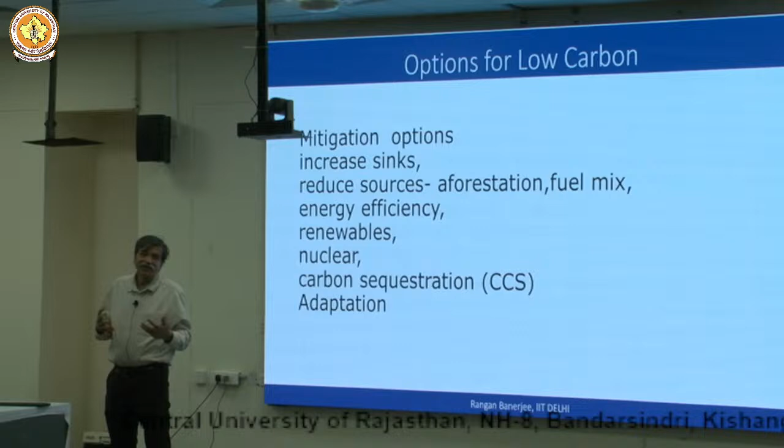What we do today, based on that, things will happen in the future, and these are the options which are available to us.

I talked to you about renewable energy, right? And renewable energy, what do you think? Look at these 5 options: energy available naturally, energy that does not result in carbon dioxide emissions, energy that has no losses of conversion, all of the above, none of the above. How many think it is one?

Out of these 5 options, just raise your hand if you think the correct answer is 1. Anyone? No? Correct answer is 2. I think people are... 3. Okay, I think you are not willing to answer.

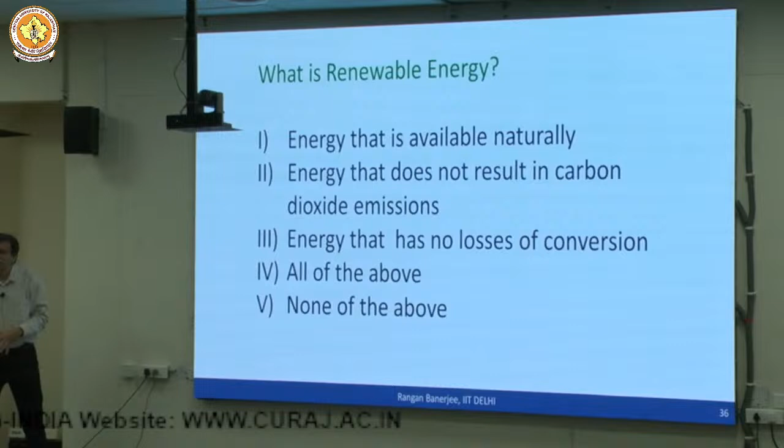The correct answer here is actually none of the above. Because fossil fuels are also available naturally. Fossil fuels have happened over millions of years of pressure and weight on vegetation, which has become coal, oil, natural gas. As for energy that does not result in carbon dioxide, you have biomass, which is renewable but can actually emit it. And all renewable energy has losses of conversion.

So I bring you this to define what is renewable and non-renewable. Non-renewable is depletable. Renewable is that the energy gets renewed despite the usage.

So in the solar PV plants that you have on your campus, the fact that you are using the solar energy does not affect the amount of solar energy which will be hitting your panels in the next year or the year after that, right? So this gets renewed despite the usage.

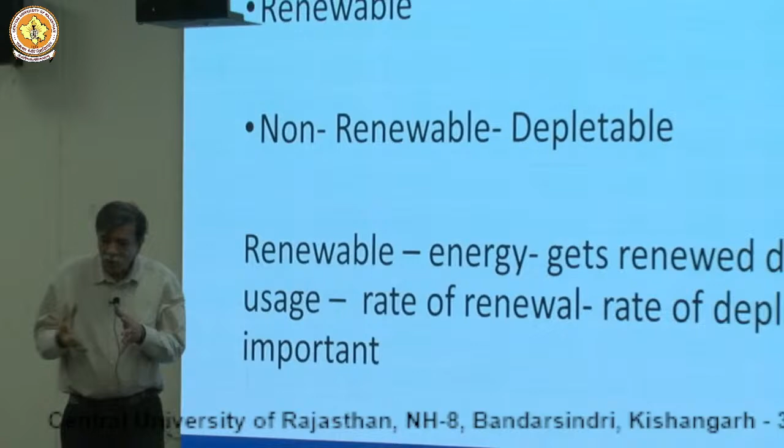That is not true about the... now even when you talk about coal, oil, natural gas, they do get renewed, but over a long period of time. The rate at which we are depleting is much higher than the rate at which it gets naturally renewed. So this difference between these two gives us the definition of what is renewable and what is not renewable.

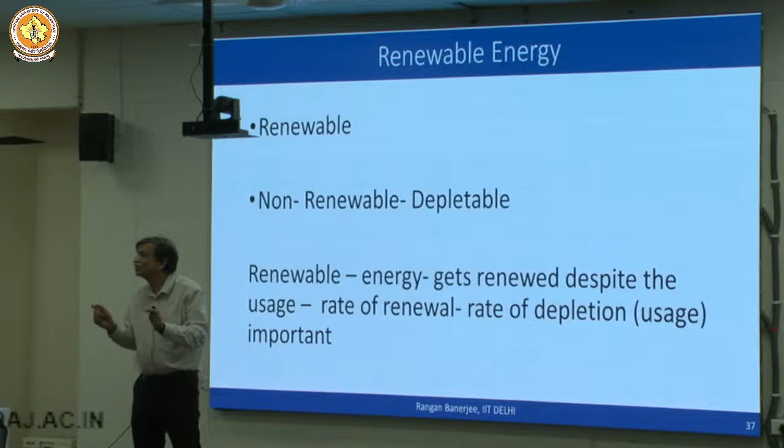I hope that is clear. So it's the rate of renewal minus the rate of depletion.

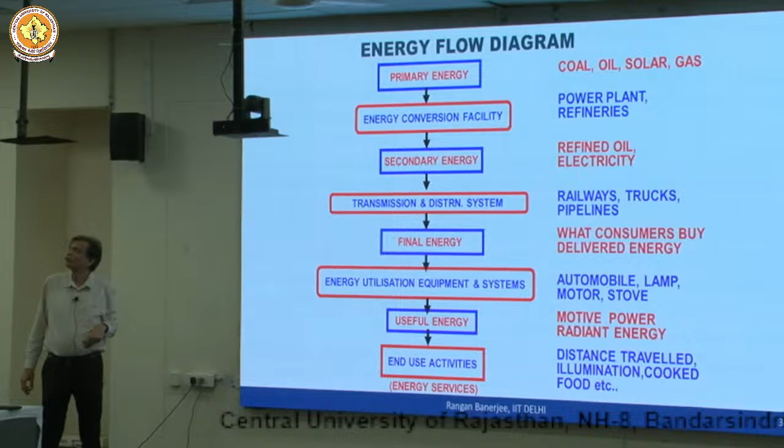Another thing which you need to understand is that for all of us, we don't have a demand for energy per se. It's not like you're talking of a certain amount of something that you consume and you have a demand for that.

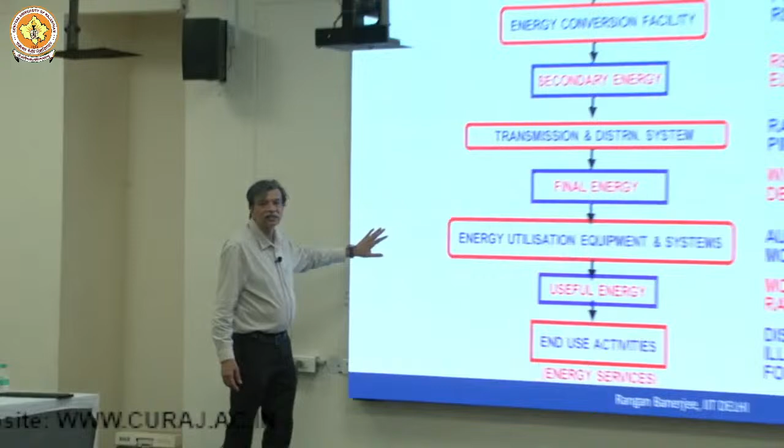What we have in this room, you want to be able to see this projected, so you need a certain amount of lumens or light output on this. You don't really care what is the rating of the bulb in your LCD projector.

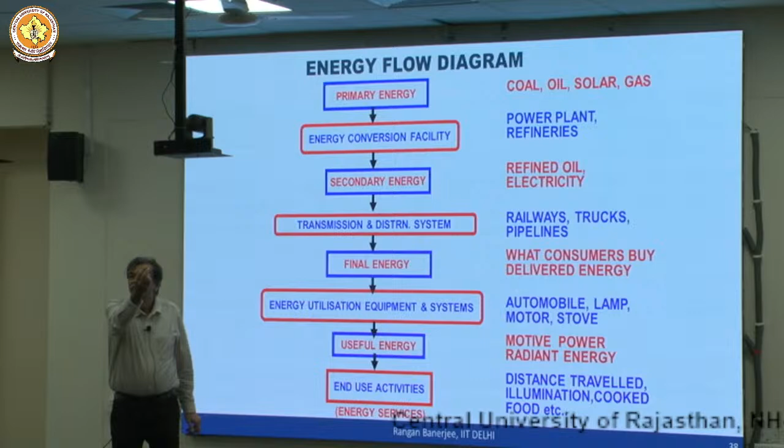If someone tells you this LCD projector is probably about a 200 watt projector, and if someone tells you I'll replace this with a 15 watt solid state lamp and give you the same output, for us we are indifferent.

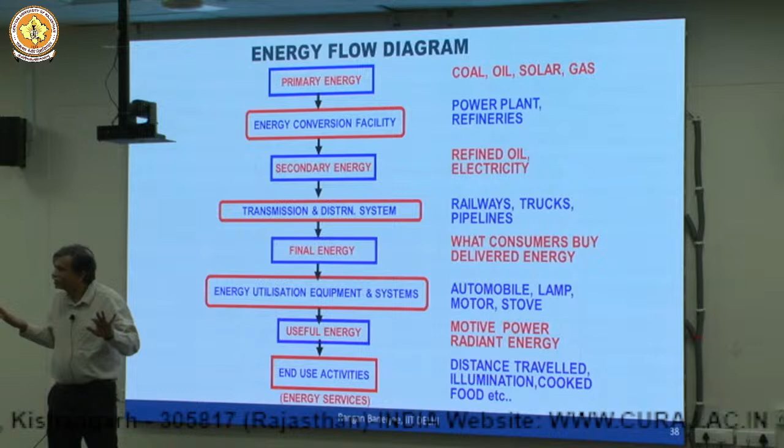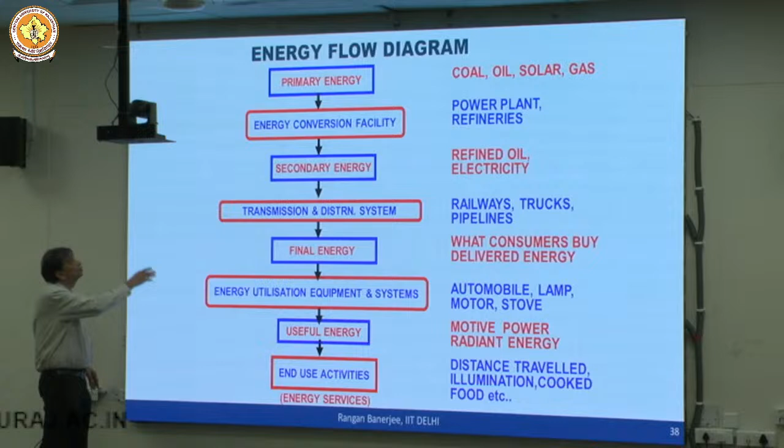So we don't have a demand for energy. What we need is the energy services: distance traveled, illumination, cooked food, motive power, useful energy. In order to do this, it goes through a sequence of conversion steps.

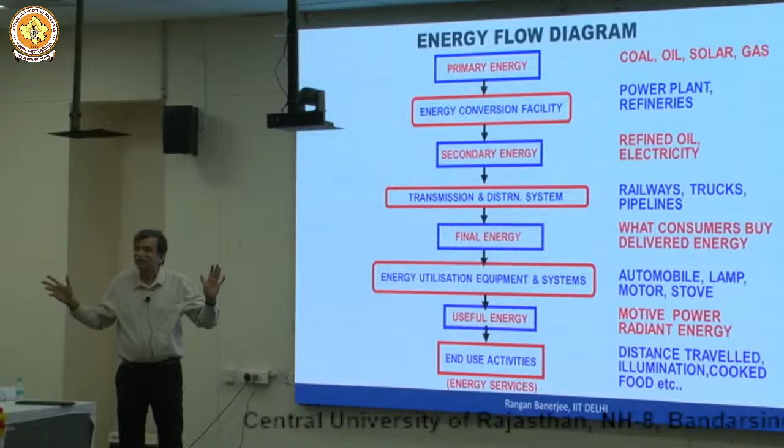And if you remember your thermodynamics, theoretically everything is a reversible conversion, but in actual practice you have irreversibility. So if you use 1 unit, you are using 1.5, like you are using a certain amount of energy to make the conversion happen.

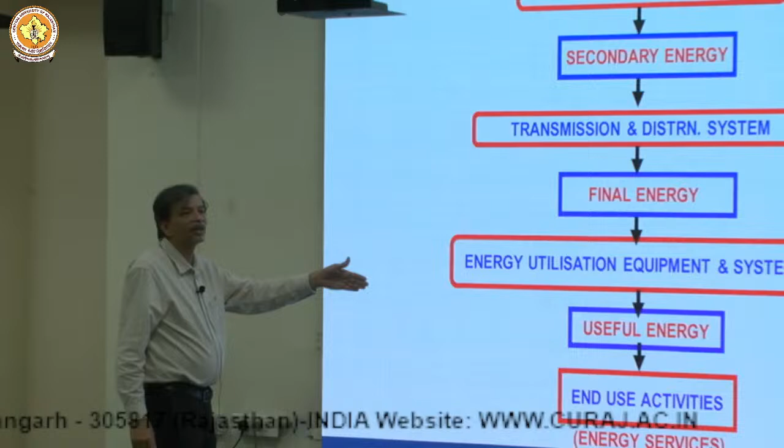So you have this whole series of steps, and one of the things that you can do is try and make all these steps efficient so that you can get the same useful energy while using less of the primary energy, or the energy that is available in nature.

Just to give you now, what I've done is you can take aggregate what is the total amount of energy used by India and the world. And if you see this, you will find that we are 1.4 billion out of about 8 billion population, which means 17 to 18% of the world's population.

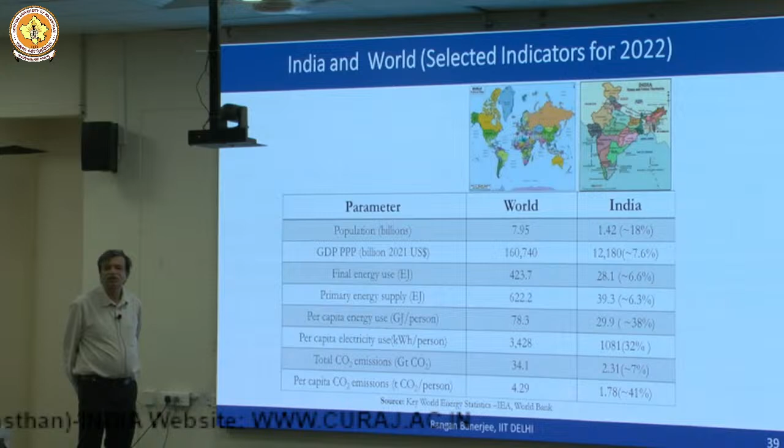And we are on an average poorer than the average person in the world. And you can do the per capita consumption - we have only about 8% of the world's GDP and about 7% of the world's energy use.

600 plus exajoules is the world total, about 40 exajoules that we use, and per capita energy use is only about 40% of the average. So naturally, the CO2 emissions for an average Indian, averaged over the villages and the cities, is about 1.8 tons per year, which is lower than the world average of 4.3 tons per person per year.

And how many of you have heard of the tragedy of the commons? How many have heard of the tragedy of the commons?

Tragedy of the commons means essentially there are certain things which are common resources. The classic paper by Garrett Hardin, 1960s or so, describes a grazing land with many different farmers who own cattle, and there is a common pasture where the cattle graze. Each farmer tries to optimize output by having more cattle, and all those cattle come to the grazing land. So the optimal thing is maximization of profit, and everyone is doing that. It goes on till the point where there are so many cattle that the grazing land gets denuded, and the whole system collapses. The CO2 problem is very similar to this.

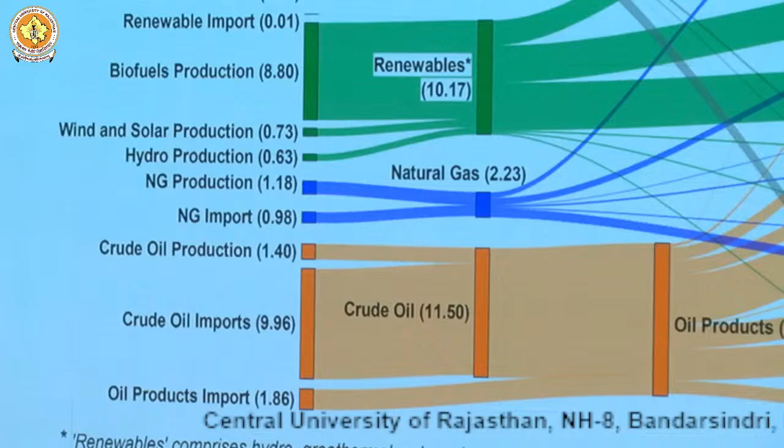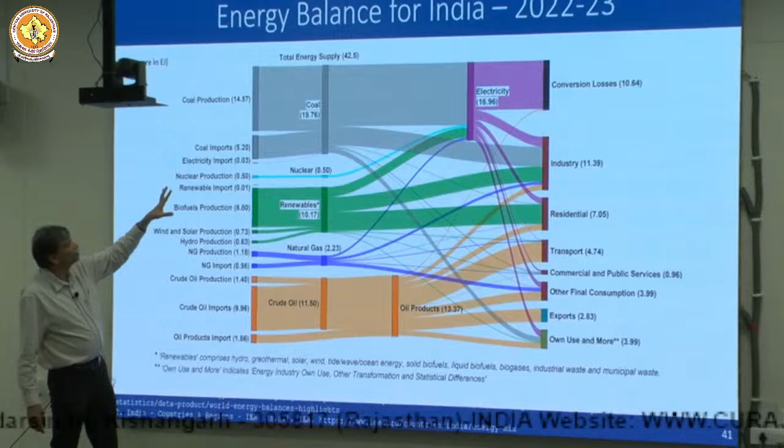This is sort of an energy balance if you sum up for India. Predominantly our energy is coal, followed by oil, and most of our oil is imports. Then we have renewables. A large proportion of the energy we use goes into electricity, and renewables is there, but relatively small in this. It's a growing portion as we go ahead.

So let's look at the power sector, which is again important. In the power sector, by installed capacity - by the rating of the plants - about 50% is coal, but by generation it's about 70%.

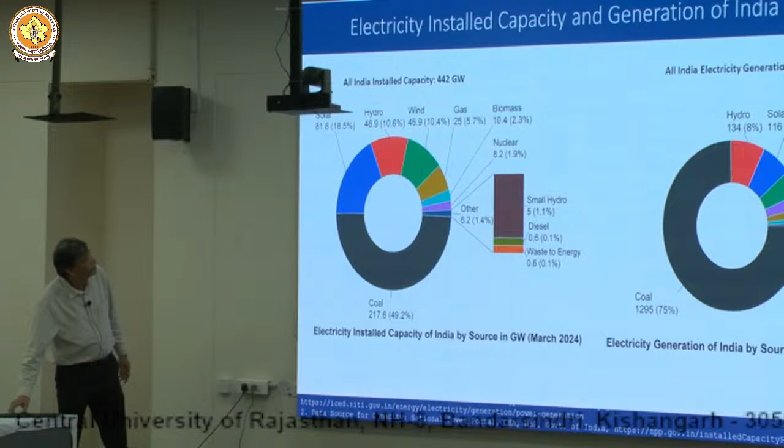And then you see what happens here, and we go back. Some of you - I don't know - have any of you visited a thermal power plant? Any of you visited? Okay, great.

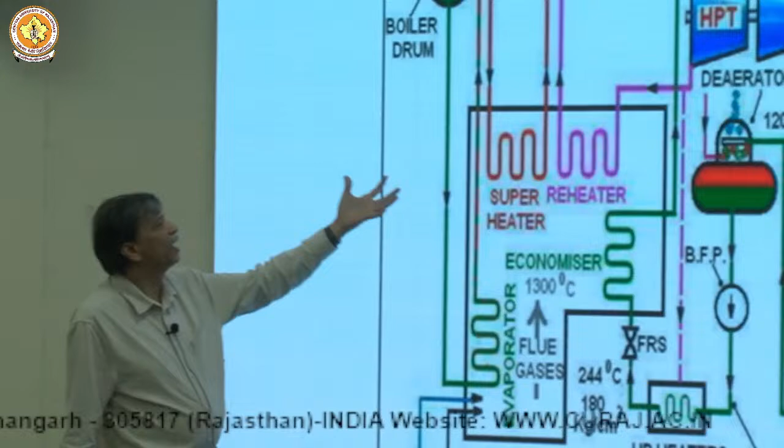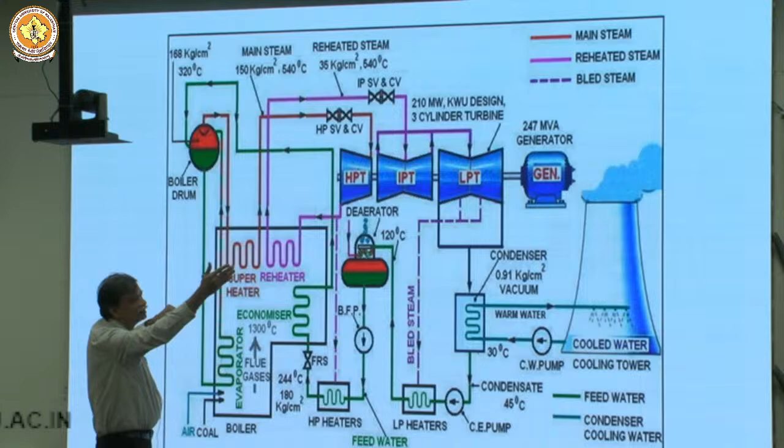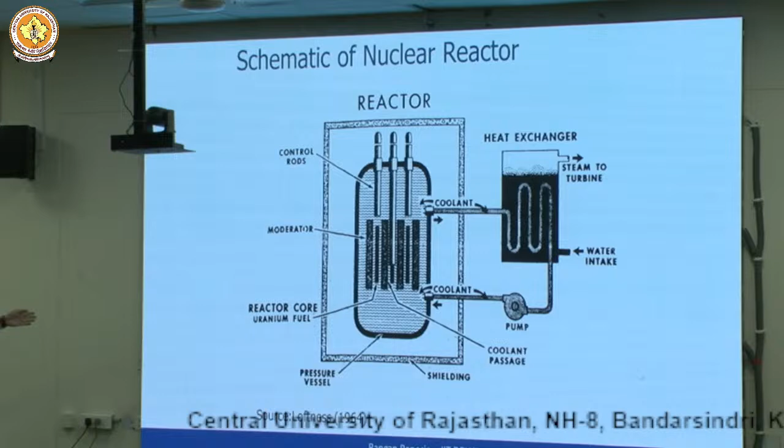So you'll see in a thermal power plant what you have is coal being burnt in the boiler, then steam is generated, that gets expanded and you get work, that work gets converted into generation - electricity, a generator - and then gets supplied to the grid and you get electricity. This has been the conventional way of fossil fuel burning. We have similar kinds of things where instead of coal, you have a nuclear reactor and you get steam and then do that.

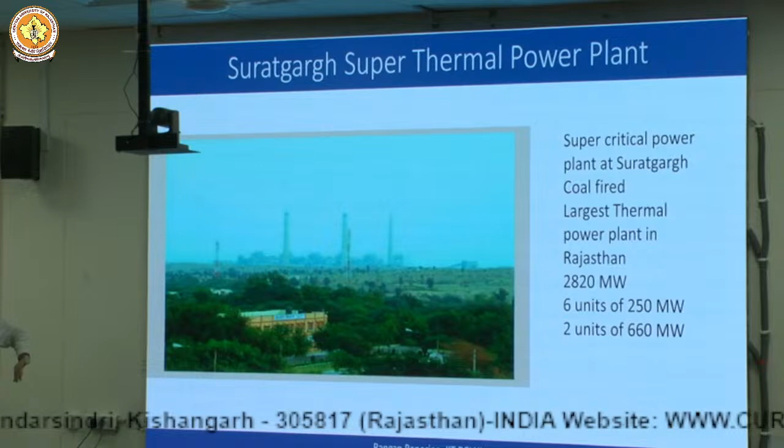Anyone been to Suratgarh? Okay, great - this is in Rajasthan. I was just trying to take some examples from Rajasthan. We have a large power plant, super thermal power plant in Rajasthan, 2,800 megawatts. Whenever you look at this number, you have to compare it with something - compare it with this campus. Requirement is 1.5 megawatts, versus 2,820 megawatts - gives you a sense of it.

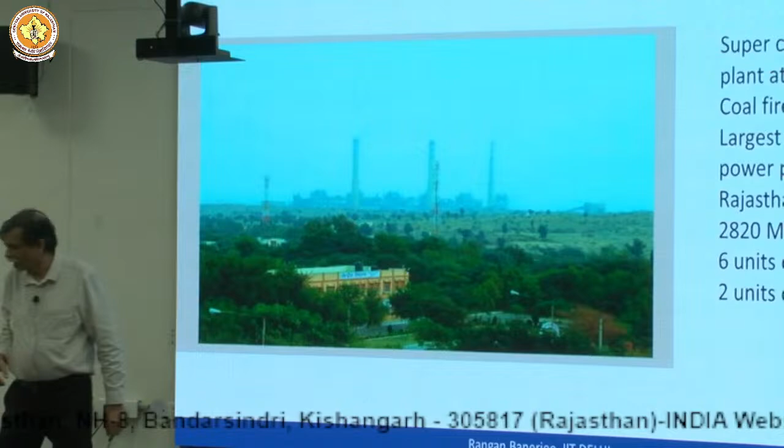It has 6 units of 250 megawatts, 2 units of 660 megawatts. These are supercritical and more efficient, where the steam conditions are higher. And we will look at renewable options - there are various ones. I'm going to talk to you a little bit about solar.